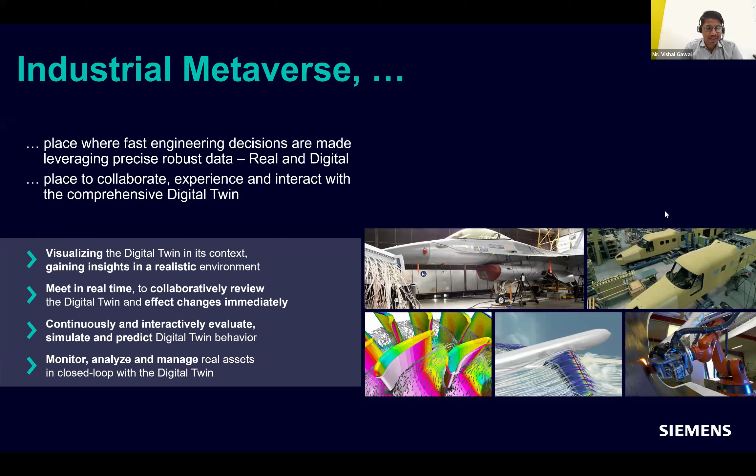That is the thing where industrial metaverse will be a big thing in the coming future. This is an evolution process, not a revolution, but an evolution, as we see from here.

We started with 2D design, then it became 3D with different digital transformation tools, then 3D simulations along with virtual HMIs where a human can interact with those dynamic 3D models. Then multiple domain designs, where we have model-based simulation.

Then your product design simulation and production process simulations. So all those things, from production to the performance of the product, we have a design simulation of it. And the next part—I think we've all heard about AR and VR.

MR is also coming into the picture—mixed reality. Whatever simulations or designs we have done, we can visualize those in a real immersive environment by using AR and VR, where we can take fast decisions, having design reviews across different geographical locations. People can join those VR conferences and take decisions, optimizing our designs and simulations.

And the next part is IoT—we are taking the data. As of now, we do this in a virtual environment to optimize or calibrate our virtual plant. We take data from the shop floor using IIoT or IoT. So we call it a digital twin, where data from our shop floor is taken and implicated onto the digital model.

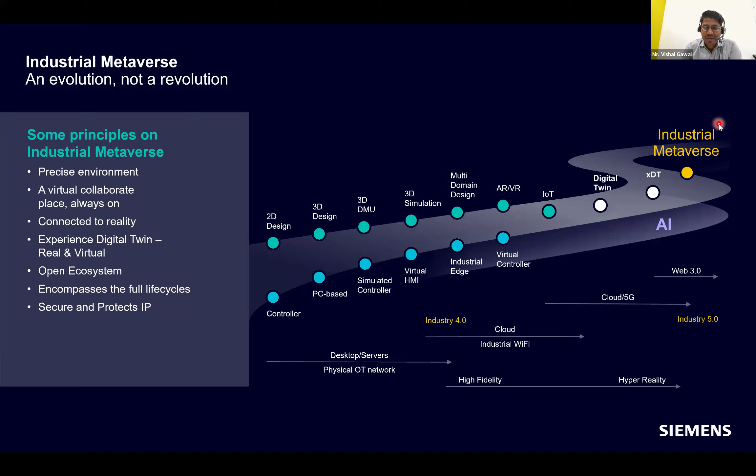To shed light on this metaverse terminology, how exactly it will work: there's digital data, which might be your shop floor asset data, the specification of physical assets, and then real data, where we have quality specification parameters, your robot OLPs, PLC programs, and all. All this data will be gathered.

In Siemens, we call it an Xcelerator platform, where we gather all the data - from the shop floor, from digital tools like simulation tools, design tools, or manufacturing execution systems. All that data goes into the Xcelerator platform.

Then it will create a global scene. As I was talking about photorealistic rendering, it will create a scene or viewer where you'll have your factory's digital replica, which looks real, by using photorealistic rendering platforms like Omniverse. We had a tie-up with NVIDIA Omniverse, which is a photorealistic physical simulation engine.

We add one more dimension to it, called time. So time frame data we're taking from digital and physical assets is implicated onto this global scene, which might be for a particular station, line, or whole plant - you can even visualize the plant from different geographies. The data coming from the shop floor or the digital twin is gathered, analyzed, and implicated onto the top of this global scene.

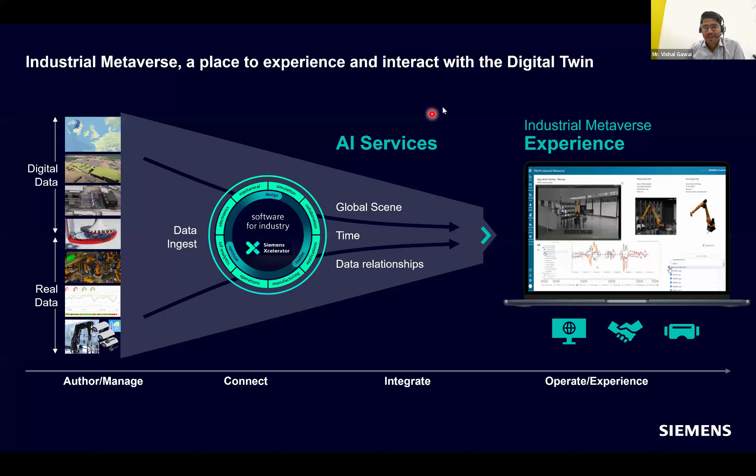The thing is, how it works: this is our real production line or plant where we collect data using a tool called MindSphere. We have this tool where you can collect required data in terms of time series data or live monitoring data, and stream data streaming happens in this tool, which is supported with AI capabilities where you can provide this data for learning models. Using that data, we can provide it to the digital replica of this model - this is a tool called Plant Simulation.

So something similar can be done with process simulation also. Plant physical data can be collected and run on the virtual plant. We call this a replay of that data. Wherever a bottleneck happens, it will get identified in the virtual plant, and corrective actions will be taken care of in the virtual environment.

Some strategies or what-if scenarios can be run here. For example, if only one robot is used for palletization, it creates a bottleneck or accumulates cartons at that station. In the virtual environment, you can create one more asset to do the palletization, and if it clears the bottleneck, you can suggest that decision to the real factory, which will minimize resource burden and improve throughput per day or per shift.

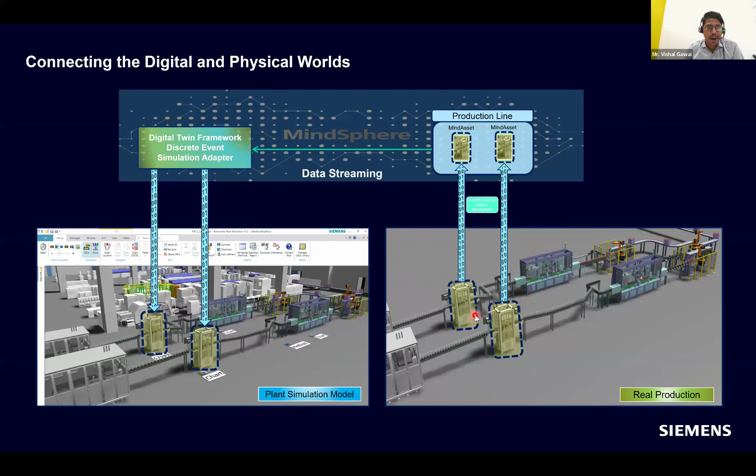So this is the use case I was talking about, where you can take feedback from the plant, like MTTR, mean time to repair, mean time between failures, and performance design improvement using a precisely calibrated physical model with a higher level of confidence.

So initially we have a virtual model, which is on an experimental basis. Once you get data from the shop floor, you calibrate that data, making it closer to the real world.

By doing that, you can do bottleneck analysis using plant floor data, which becomes a powerful tool to identify constraints, whether station constraints or asset constraints, and then create strategies to overcome those bottlenecks.

Then diagnostics of different processes which might be becoming hurdles in your throughput increase. So you can identify those, diagnose, and take action on it.

One more thing is predictive maintenance. In the real physical plant, we have data about the last calibration and tool wear and tear, maybe RPM data for tools. That data can be taken, and predictive maintenance strategies can be decided in the virtual model, and the same thing can be given to the physical assets.

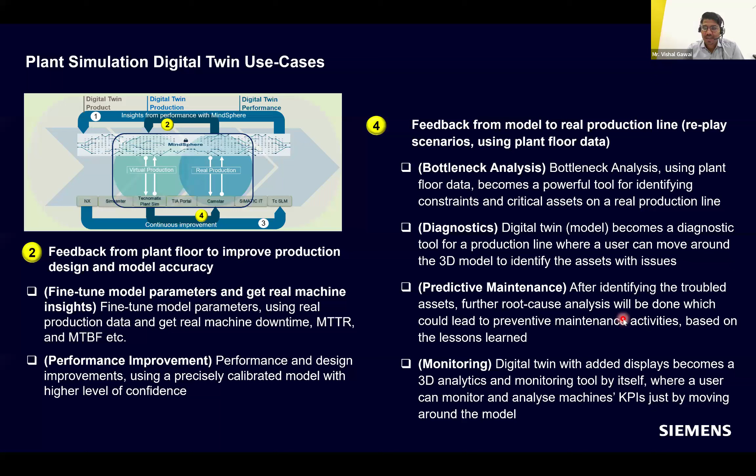Another one is monitoring. You can monitor the asset health, monitor the energy consumption of a particular asset, which might be a robot, special purpose machine, or supporting devices like material handling equipment. By monitoring and optimizing the consumption of energy and resources, you can increase the KPIs decided for the growth of the company or organization.

So this was how we can optimize things, and these are the tools we are going to use. This is the actual topic we are going to cover in detail: a solution overview to do the metaverse or digital twin, which will be helpful to optimize your throughput and optimize your robotic processes.

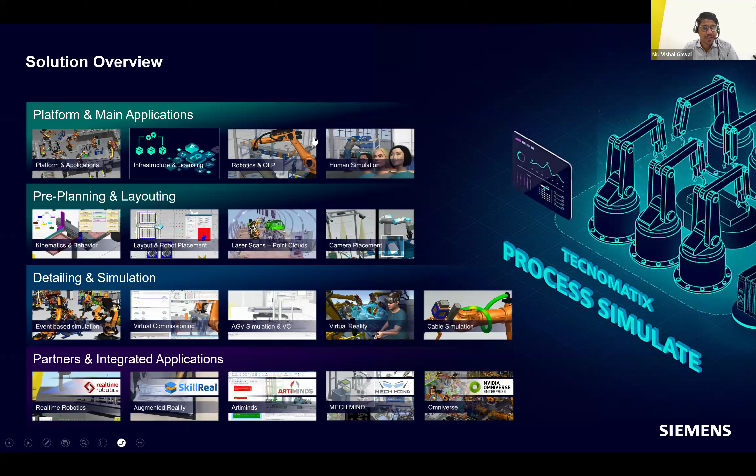By utilizing this technology, you need not have to disturb your production shop floor. You are doing all those things in the virtual environment, validating all the robotics processes, paths, logic, offline programming, your human activities also you can validate here in virtual environment. Then PLC logic also can be validated. Just you need to take those robot program, PLC program to the shop floor, and with minimum dry run, you can go live with your production.

So what exactly this platform looks like, I'll just put some highlights on it. We have an end-to-end solution, from conceptualization stage or planning stage to the design, then layouting of your plant and floor, then material optimization, as I was talking about the bottleneck and throughput analysis.

And then the next part here, ergonomics engineering. It might be human ergonomics, it might be robotics ergonomics, because we need to consider the robot optimized path with collision-free trajectories, and we need to work with different robots and machine interface. So robot has to talk with machines and other robots. So those kinds of robotics engineering also involved in this tool.

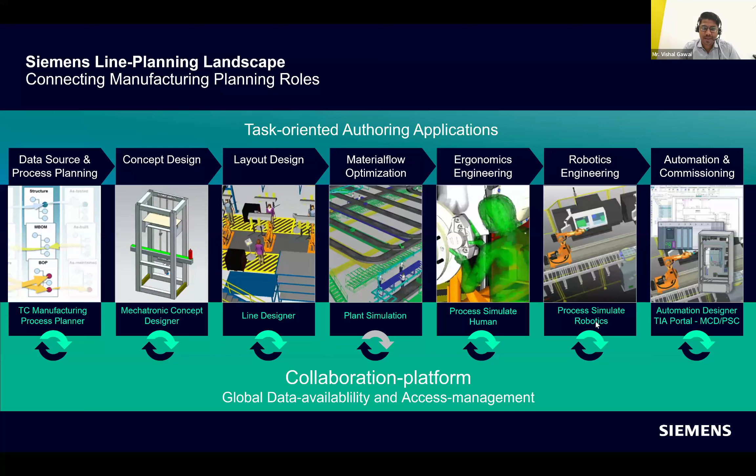So what this tool does, it will author the geometric modeling, where you can import different CAD formats or CAD libraries, which can be from different CAD tools. It supports a native format of .jt file, but you can import any file format with the CAD translator which it supports. Then you can assign the kinematics to it.

If it is a well-defined robot, you'll get it from the library. If you're going to create some new gantry application or new robots, you can assign the kinematics, validate those kinematics well in advance in this tool.

Then again, you'll identify the operations which you're going to do with this in whole cell or line. You can create those operations. You can create a robot offline program with the help of this tool. Integrate those robots with different machines, and your jigs, fixtures, clamps, end effectors called grippers or welding guns. Create a material flow from end to end.

Then you can analyze the collision and safety factor of those robots, reachability of robot, because you need to place a robot at a certain place where it will be reachable to all the points, which might be in your pick and place operation or welding operation or any of the robotic operations, which will utilize your space effectively, and you can optimize your layout in that case.

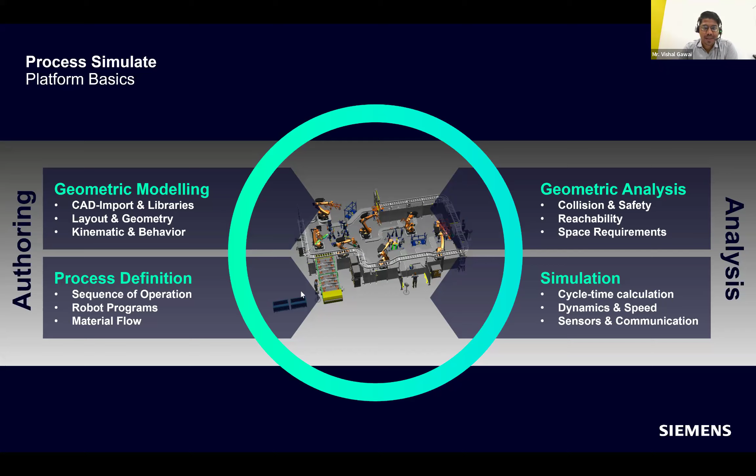So it supports different applications. As I talked about the kinematics, reachability, sequence of operation, you can create out of that. You can create different reports in the form of HTML format or movies, or you can utilize a robot viewer or robot report generation tool where it will give you the robot energy consumption for that particular operation, because it becomes one of the factors to set up your factory, or total energy consumption of your factory.

In terms of robotics, you can create joints, the manipulation of joint. If you are going to create a new robot, that also you can create from scratch here, and validate those joint values, the link, the length, and all.

For the existing robots, from major robot makers like ABB, Kuka, Kawasaki, Universal Robot, the cobot from Universal Robot, you can bring all those things which are supported in this tool, where you can do the offline programming, trajectory planning of those robots, and you'll get the exact cycle time from this tool, where we can directly implicate those cycle times and the robot program onto the shop floor without any hurdles. We did not have to do the manual teaching using teach pendant on the shop floor.

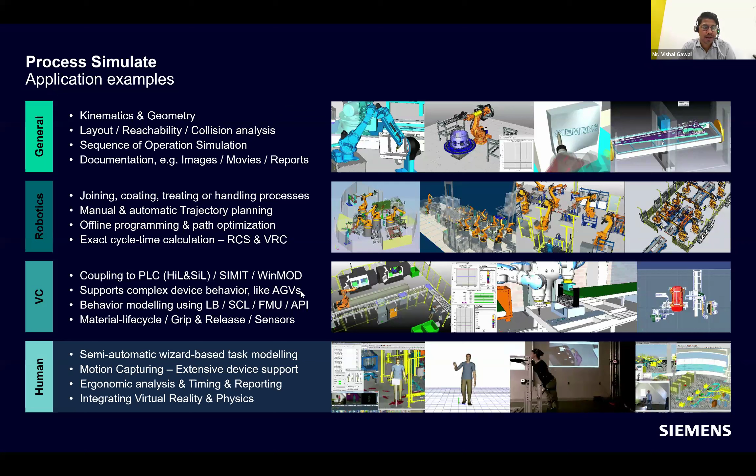And then the human simulation. Not all industries have automated processes. Some have semi-automatic or manual processes like wiring harness assembly, or some automotive assemblies done offline. For that purpose, we need to capture human operations, which should be ergonomically correct. We need not overburden the human simulation for a particular repetitive work, because it creates fatigue for humans working on those assembly lines or stations. So we can validate those SOPs, which should be ergonomically correct, and suggest the optimized way to do that with minimum cycle time. So this is the capability of the tool.

Okay, I'll go into some detail into the robotics part of it.

Before that, I just wanted to know, is the pace correct, Saroj, Dr. Saroj, or will you suggest something according to our participants? Yes, Vishal sir. Some of them, I think, are from academics background. If they need more detail, you can interrupt me and we can go ahead with questions and answers also if needed. Okay, sure. I'll continue, then we'll take the questions if required. All participants, if you have any question, please raise your hand, I will allow you to speak. Sir, we can continue and take it at the last. Just one question has come, sir, in the chat box, you can read it. One second. Okay, can you read it for me? I'll just try to give the answer.

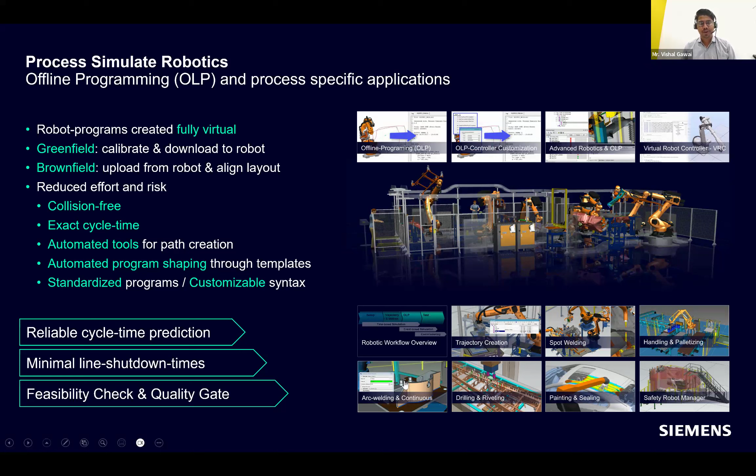By that way you can bring all the robot programs from the shop floor to the virtual environment, fine tune this program, and again give it back to the shop floor for optimized usage of these robots.

Then again I'll go to the human simulation part of it. Though it's not part of our today's agenda, I was just trying to show how it will significantly affect the production or manufacturing processes.

Because whenever we set up a factory, it depends upon the geographical location, and the operators or human resources available for that particular geographical location will matter while designing your plant stations or processes. So this tool will support you to create different human mannequins based on your anthropometric data, gender, ethnicity, weight and age.

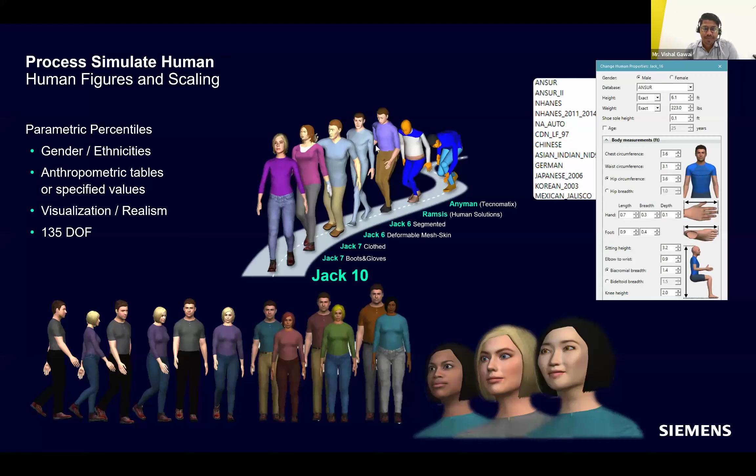So it affects the overall production processes and throughput of your factory. By that way, you can create a workforce with particular parameters and try to utilize them in terms of the actual processes going to happen on the shop floor.

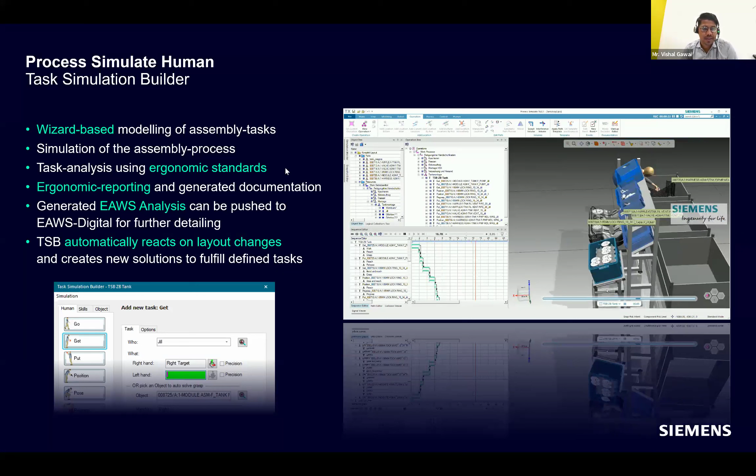So this tool can create a simulation with the help of this human mannequin, which we have created on the basis of anthropometric data, which is region wise. You can see this lady is performing some operations.

The assembly line which is created in Australia will not suffice, or as-is cannot be replicated into China, because of height difference, or the reachability, or the operator vision envelope or work envelope.

So all those things can be taken care of in this tool, where you can analyze the operator reachability, its vision envelope, its work envelope, and then identify the processes where changes need to be made.

Some changes or a platform has to be given to the operator, or some raw material bins have to be kept within the eyesight of the operator. So all those things you can identify and make changes.

It will impact the overall production timing or cycle time of your factory.

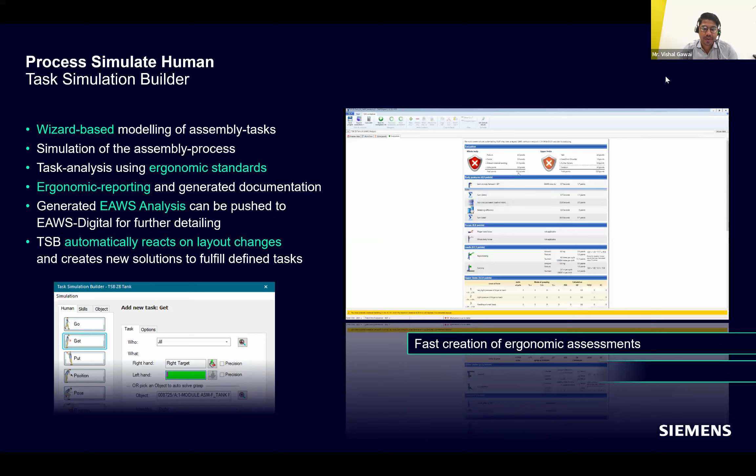So by doing this, you can quickly create ergonomic assessments, because if it is reachable, or if the operator is bending too much, by that way you'll identify those critical processes and try to change according to the application.

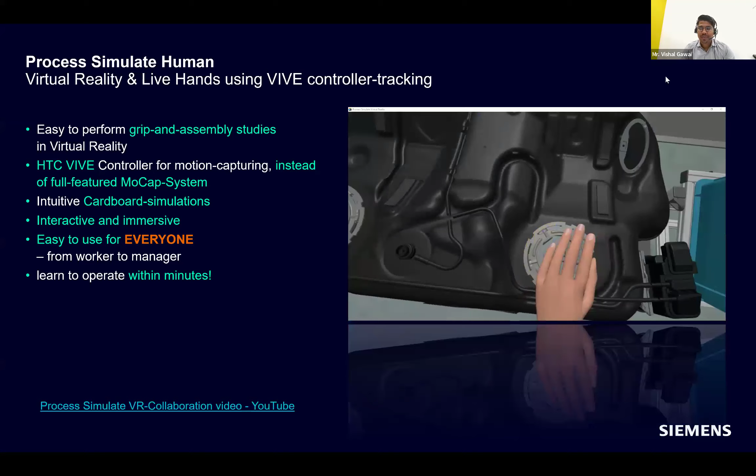So on top of that, it supports VR technology. As we all know, in an immersive environment you can immerse yourself into the virtual world and perform some of the activities which will be used for training purposes, because without having any physical product, assembly station, or plant, you can train your operator and create standard SOPs by creating the standard work instructions with the help of this VR tool and human simulation tool.

So we can collaborate and simulate extremely fast. It supports the HTC Vive head-mounted display, where you can immerse yourself into this virtual world. Easy to use application and low investment, so you don't need to create special data for it or any expensive hardware. It supports gaming VR with minimum HTC Vive hardware.

And again, as an advanced technology on top of this VR, it supports motion capture technology, where you can wear the motion capture suit or sensors on your body, perform the activities dedicated to that operator, and we can analyze different ergonomic regulations using this motion captured data, such as NIOSH, fatigue analysis, back pain analysis, or RULA analysis. You can capture that data, run different analyses, and it will generate a report. The tool itself generates a report and gives you

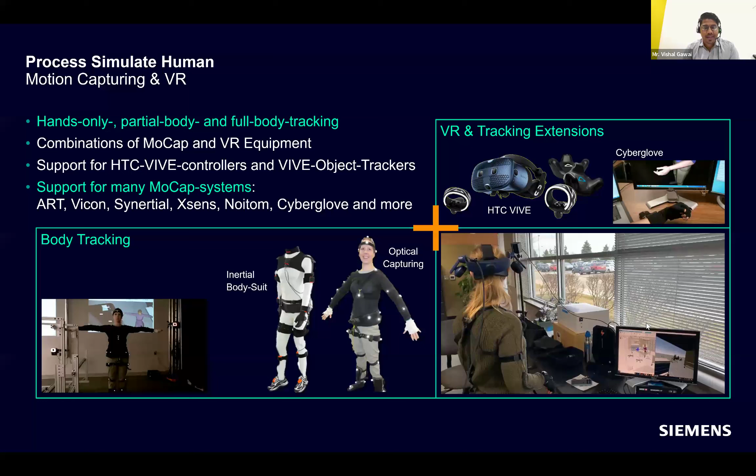So not only in industrial use cases, it is getting used in different industries - medical industries, sport industries, and textile industries. So it's useful in multiple industries.

So as I was saying, we can create this VR sequencer, and by that way you'll have the instruction on your HMD head-mounted display, and operators can be trained using these SOPs without any physical plant present. By that way you can have your skilled workers well in advance available for your factory operations. You can communicate processes across the team - if there is a change in any SOPs, you can create a VR conference and it can be circulated along the teams.

Easy and fast creation of VR sequences or tutorials for operator training, so it allows us to create those VR sequences. This is again the physical aspects of the objects - you can assign physics to the object so it acts as an actual physical object. If something drops, it will go and hit the ground. Again, we need to create a new operation for it. So all the scenarios that are going to happen on the shop floor, using this virtual environment, we try to capture and create as real a replica as possible of the real, physical factories.

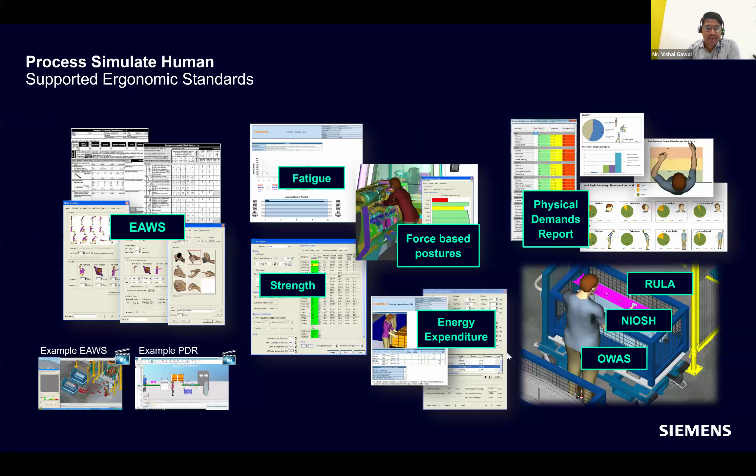And these are the regulations or ergonomic standards it supports: EAWS, fatigue analysis, strength analysis you can do, then force-based postures - so if you have to push something or lift some weight, those force solvers can also be used. Energy expenditure, then physical demands reports - if some activities are going to happen for 8 hours repetitively, how your body reacts to that fatigue or repetitive action, those kinds of reports you can generate here. And as I told, RULA, NIOSH and OWAS analysis can be done.

Some of the examples are here. So you can see here what the operator can exactly see, if he's loading some things onto the fixture, then starting the operation.

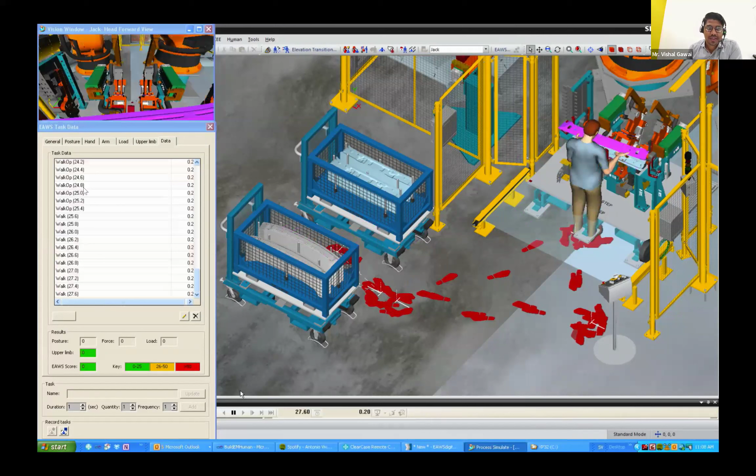Again, lifting some other objects and going to load onto the fixture. So here you can track his postures, different joints, the lower back, ankle, or elbow joints, and capture that data and create a report out of it. So such kind of reports you'll get, and these reports can be visualized by an ergonomic expert to suggest best practices.

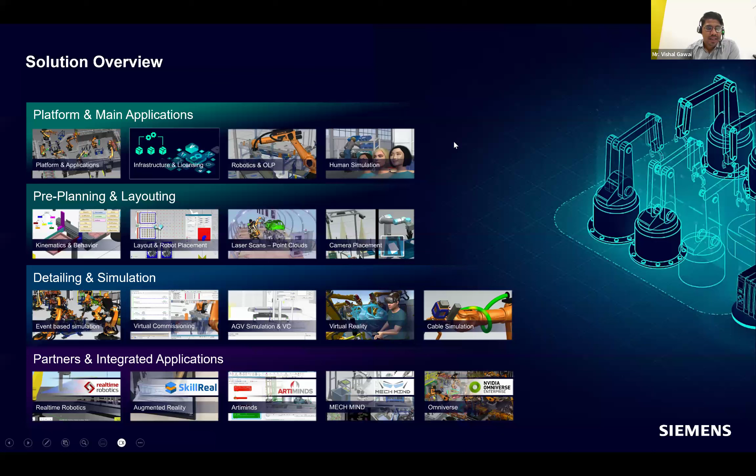This is a human simulation. Now I'll come to the virtual commissioning part. Due to crunch of time, I'll try to cover the things which are more relevant to future factories, or to increase the efficiency of factory by using these advanced technologies.

Virtual commissioning is one of those things. In the conventional commissioning, factory operations work in a series process where mechanical engineer will design the fixtures, machines, or parts. Then electrical engineer will decide the number of sensors, sensor positions, or actuators. Then robot programmer will program the robot using a teach pendant, and integrate the sensor signals into the robot program. The last part is the automation layer, where the automation engineer brings sensors, actuators, and robots together and creates a sequence of logic in PLC to trigger the actual assets.

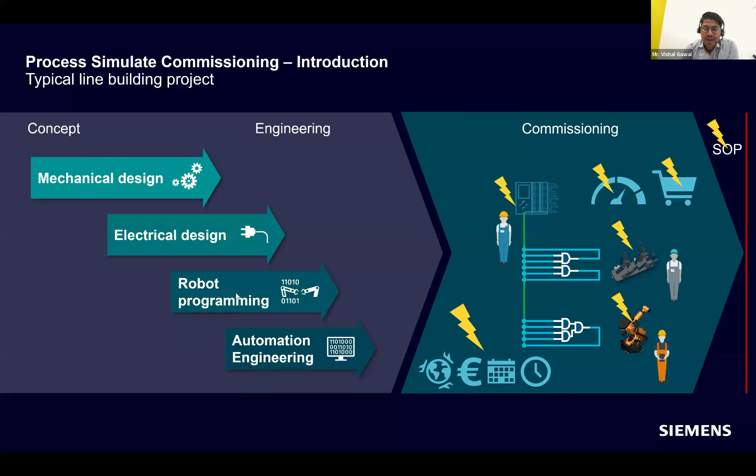By doing this in the conventional way, there is a communication lag between different departments. Whenever there is a problem, it goes into an iterative process, and a blame game happens if there is an issue at the last moment. The automation engineer will say this design is not proper, or the sensor was not at the particular location. This will eventually delay the product launch or the production target decided by management.

So it will impact your business's overall efficiency. To avoid that, this virtual commissioning phenomenon came, where instead of having things in series, without any physical assets, or at the conceptualization stage only, the mechanical design engineer can design the grippers, fixtures, robots, or special purpose machines. They can work along with the electrical engineer, where the tool supports creating sensor positions and different sensors, assigning those sensor signals with the robot, then the automation logic. This way all interdisciplinary departments can work together without any physical assets, in a virtual environment itself.

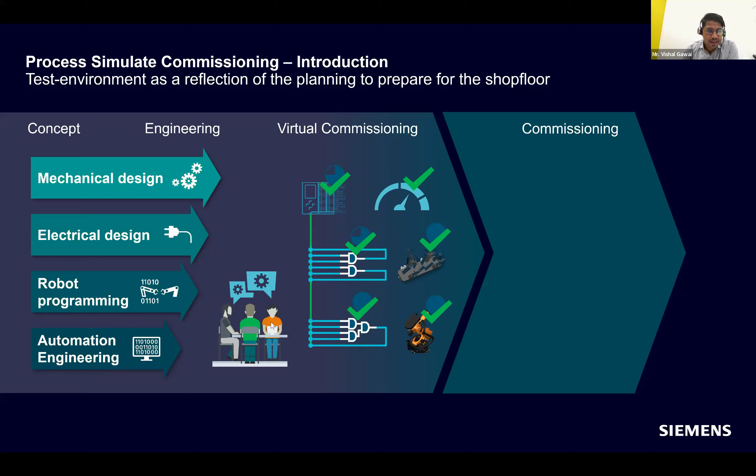They can fine tune their robot program and fine tune the mechanical design. If someone suggests this is colliding with the robot gripper, the mechanical engineer will fine tune that design, change some parameters, and send it again to the robot programmer to validate the robot program.

This way, in the virtual environment, you'll have a fine-tuned robot program, a fine-tuned PLC program, and the material flow is tested well in advance. At the time of commissioning, you just need to bring this robot program from the virtual environment and put it into the actual robot controller. Similarly, the PLC logic can be brought from the emulated PLC, which is fine-tuned and validated in the virtual environment. Just put that into the hard PLC, do a dry run, and you're ready to go live.

So you save the last moment rush, any blame game, and any damage to physical assets, because we do all quality checks, emergency, and safety signal checks in the virtual environment. You need not worry about the physical assets. Once you have the physical assets, you can directly start production.

This is the advantage of virtual commissioning, which this Tecnomatix tool supports. It has the capability to connect with different PLCs, which might be from Siemens or other PLC makers like Rockwell or Mitsubishi, and it supports the OPC UA protocol, which is open source, where you can connect to any OPC server. This simulation tool can act as an OPC client, giving bidirectional signal communication.

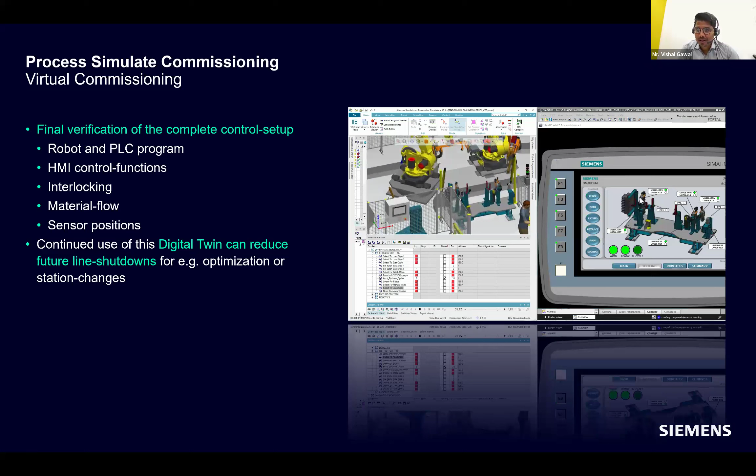All those things you can do in the virtual environment. Here you can create virtual HMIs also, and test all the logic and functionality of the devices, robots, and interactions between the robots, machineries, and end effectors. You can see here auto run, or clamp closing and opening, from the PLC logic happening in the virtual environment.

So by that way, you have a virtually validated process flow, devices, robot programs, and PLC program. You're just ready to go live directly in the production environment.

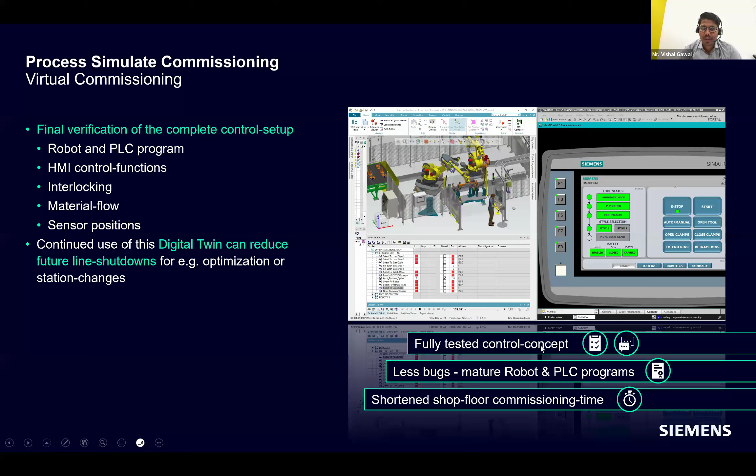So this is the advantage of it. It's fully tested control concepts, robot programs you're having. At the last moment, you have less bugs, or what is a minimum, trial and error concept is erased here, and you can just work on the fine-tuned robot program for the direct delivery.

It will eventually shorten the shop floor commissioning time, which was the major part in terms of factory setting and factory automation, because if you need to set up the factory, some commissioning or PLC engineer has to travel there and do 1:1 program for the entire devices, then integrate those devices and create a whole program. So all these efforts of human resources as well as factory resources can be optimized, and all those things can be done in the virtual environment well in advance.

There are two ways to do that. As I was talking about, software in loop, where you connect the emulated PLC with the simulation tool and validate your logic. Another one is hardware in loop, so you can connect hardware also, hardware PLCs or real PLCs which support OPC or another protocol. You can connect that into the hardware in loop with the Tecnomatix tool and validate your logics.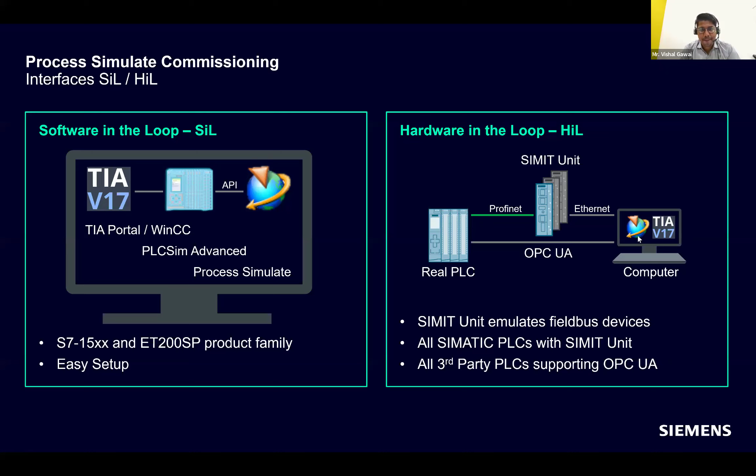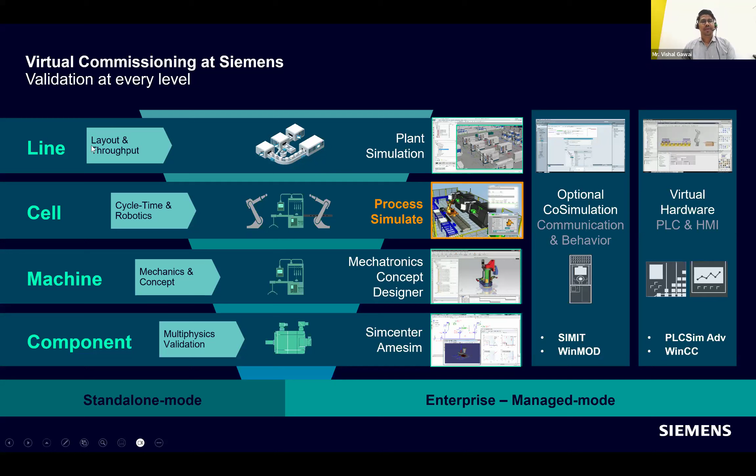Similarly, we have different tools available in industry to do virtual commissioning on component level, then machine level, if there's mechatronics involved into that machine, then cell level or station level, where you have multiple robots with different devices like conveyor, jigs, fixtures, grippers, and different machines. So those kinds of virtual commissioning again you can do. And then line level or plant level, where you can do commissioning for the entire plant using a plant simulation tool. So there are different tools to do different levels of commissioning in the virtual environment.

So that is the virtual commissioning part of it.

So I think at last I'll try to cover this Omniverse, which is again a part of metaverse which I talked about initially. Recently you might have heard about the Omniverse or OmniLab, which is a GPU-based simulation engine, which can simulate physically accurate simulations or real-time scenarios into the Omniverse. So Siemens has a tie-up with the NVIDIA Omniverse, where whatever simulation we saw in the previous slides can directly connect to the Omniverse using these Omniverse connectors.

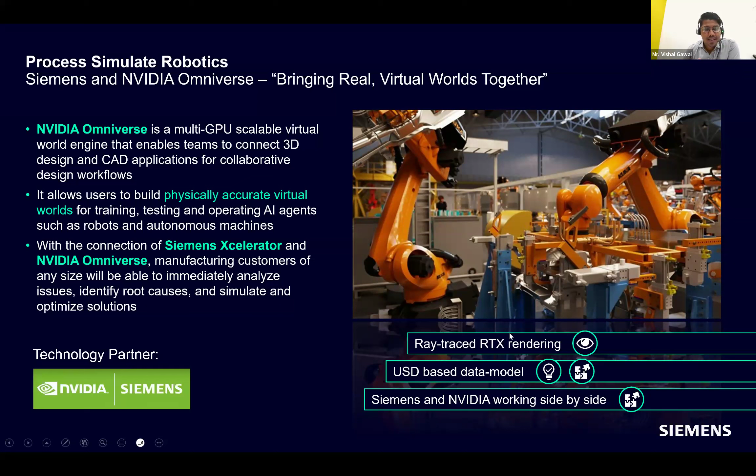By that way you'll have a photorealistic simulation, which will feel and look like real, in case of your real shop floor images or shop floor scenarios.

So this is one of our customers, called Freyr Battery. They are a Norway-based company which is going to manufacture EV cells or batteries for electric vehicles. So this is their future factory. Without having anything on the shop floor, we can create these future factories, which here you can see the 1:1 assets. It's a mixing process for them.

So for battery manufacturing, mixer is one of the critical processes. You need to mix different reactors or metal coating powders. All those parameters you can simulate here and optimize in the digital world itself. This is a simulation tool called Simcenter, which will try to give you the predictive quality of that mixture in the virtual environment. By that way you'll get a cycle time to run that mixture, and then you can replicate that thing into the actual plant.

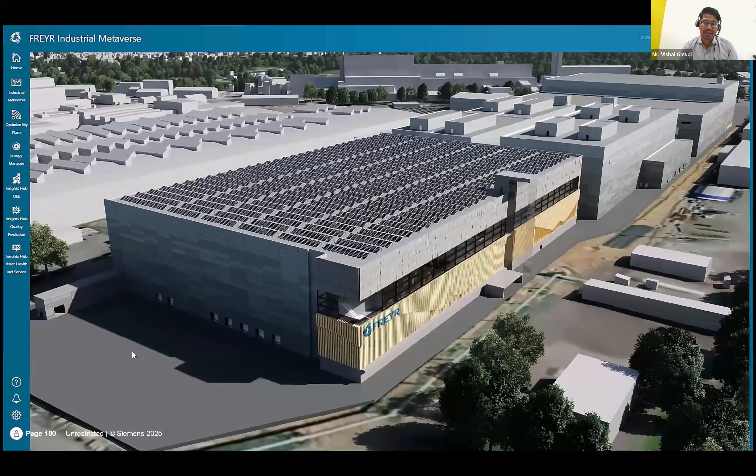By that way, you can create future factories, validate your processes, utilization of resources, and it will help to take a decision for management authorities, so we can invest into these factories. By investing this much, we'll get these ROIs, or we are going to produce this much units per year or per month with the help of these virtual simulations.

By doing this collaboration, the strong simulation along with the robotics capability - Siemens has a tie-up with NVIDIA where it leverages the photorealistic rendering part of it. So you can see the robots and their guns looking close to real, exactly as can be seen on the shop floor. By that way, for visualization purpose, to do the digital walkthrough of the factories, this tool is very useful.

This is a Tecnomatix viewer, and once we connect with the Omniverse viewer, you can assign the material, assign the lighting and fine tune those visual effects of the rendering part of it. By that way, you'll have photorealistic simulations of your factory.

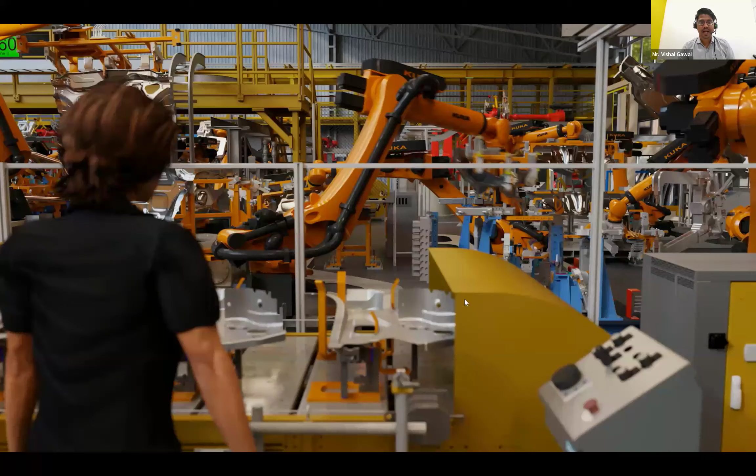Similarly, one use case I wanted to highlight - once you have your object or the parts on which you wanted to do the operation, which might be a welding operation or pick and place operation, by using this photorealistic rendering part, you can train or create synthetic data of that object from different angles or different lighting conditions, and feed that data to the AI algorithm, which will give the robot instructions - if it finds some kind of data, it can pick that part and place it to different locations. So those synthetic data can be used to train the AI models for robot operations.

In future it will become more powerful by using all these tools to take decisions on their own. I think here I'll stop my presentation or talk on this topic. If you have any questions, you can ask those.

I think we can open the forum for questions and answers, or if they wanted to see some more things, we can show that also.